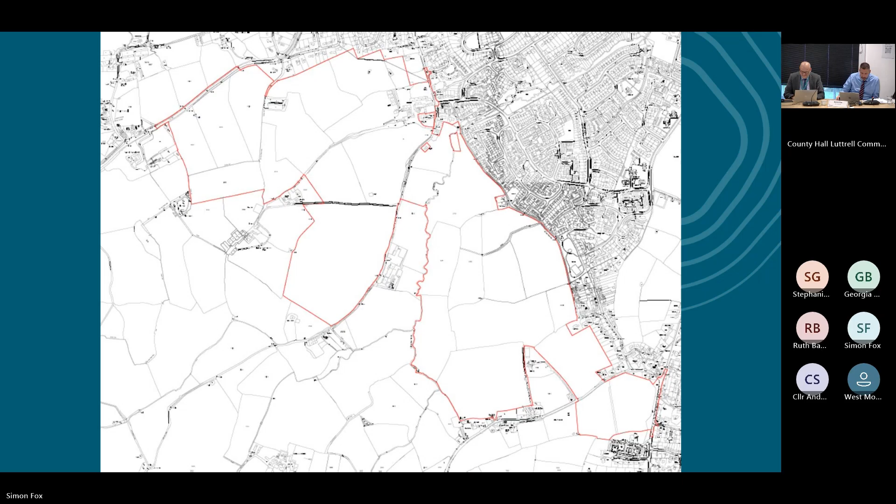Today's focus is on this sort of middle part of the site. You can see from the earthworks on the aerial imagery, that's the part of the site that's currently being worked on to deliver the spine road through. You can see the Orchard Grove Church, which is based at the primary school at weekends.

This is slightly out of date, but it shows the housing having started in the northern part of the site, now coming down across the site towards Trull. So the area that is concerned by this NMA is the area roughly circled in red.

Without the benefit of a site visit, and slightly relying on members recalling from site visits that have been conducted in the past, these next few slides seek to illustrate the nature of the site that we're looking at today.

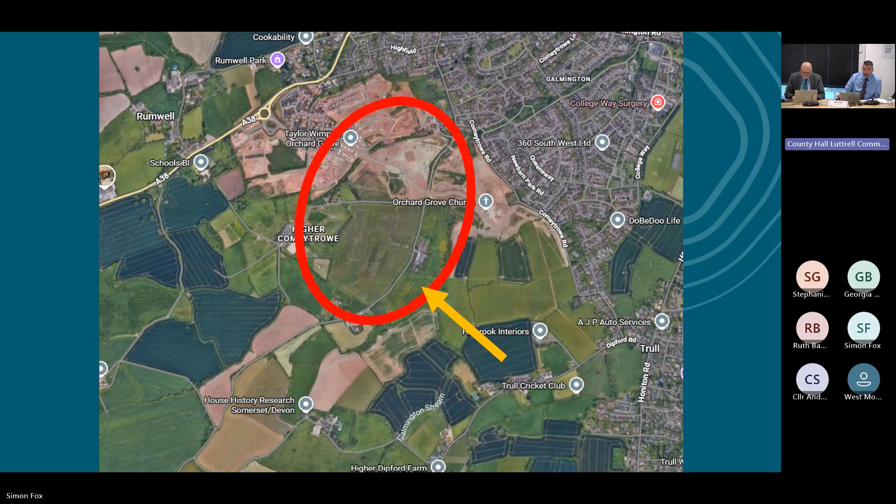So this is the green wedge between the two parts of the allocation. This yellow arrow basically signifies where this bottom view is taken from and where this top view is taken from, to show that the site is not level by any means. It's falling away in different directions, and it forms a high point in the general landscape.

You can see here there's a fall off towards a property called Grassy Rivets, and there's a fall away here to the former abattoir site. The land around the abattoir forms the green wedge that's part of the Comeytrowe garden community site.

The levels are important, and this is an aerial photograph before the site was started. This is the A38, and this is where the roundabout now is at the north end, and the spine road goes through the site towards the Galmington Stream and over to where the primary school is, in this location. Today's application is for effectively this field here.

You can see the abattoir now on the other side of Lipe Hill Lane, and the application extends into this area here. But even on this image, you can see that the land is falling away in various directions, and that's why any application for land remodeling or regrading is of particular interest and needs particular scrutiny.

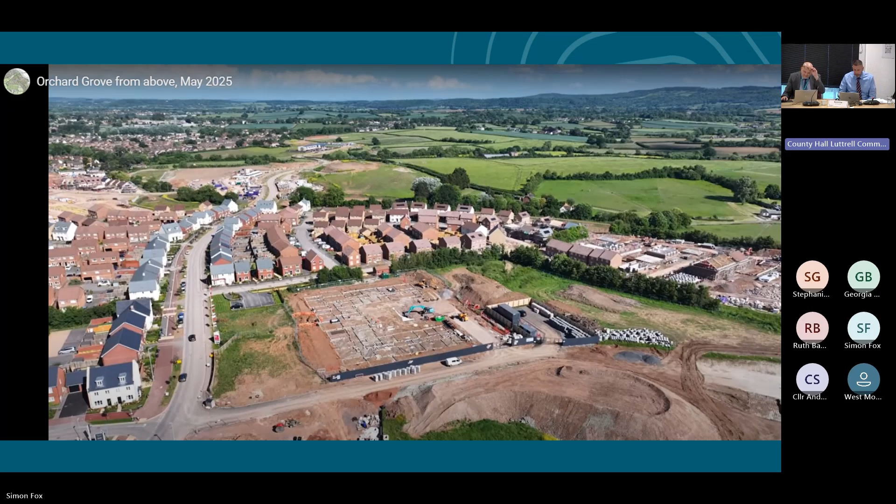So hopefully that's given a sense. The wider area is crisscrossed by public rights of way. On this image, the site that we're looking at is this field here, sandwiched between Higher Comeytrowe Farm and Lipe Hill Lane and the abattoir.

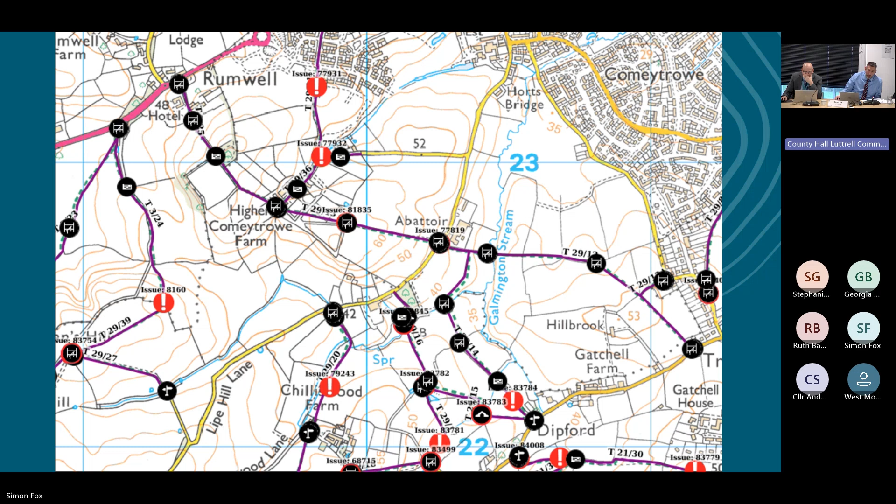You can see here from the topographic information on the OS survey that the high point is in this corner and it falls away in different directions.

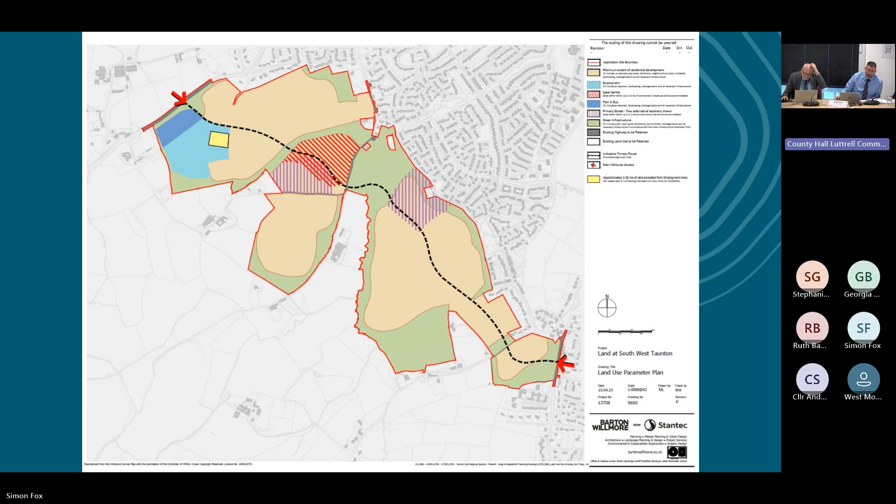This is the land use plan that is approved as part of the revised outline. It shows in a tan colour, the buff colour, the extent of approved residential development and green space surrounding that residential area. You can see that there.

This is the green infrastructure plan. This shows again green space around the outer edges as part mitigation for building on high land, and to provide the requisite quantum of green space for residents to enjoy.

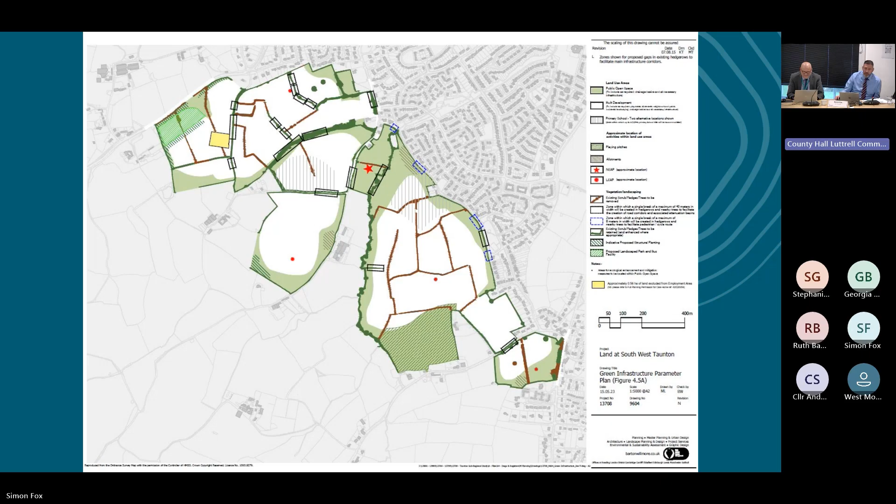This is the approved master plan, which is a refinement of detail from the previous two plans. This shows the intention at the time to lay out a massive residential development surrounded by these outer parks.

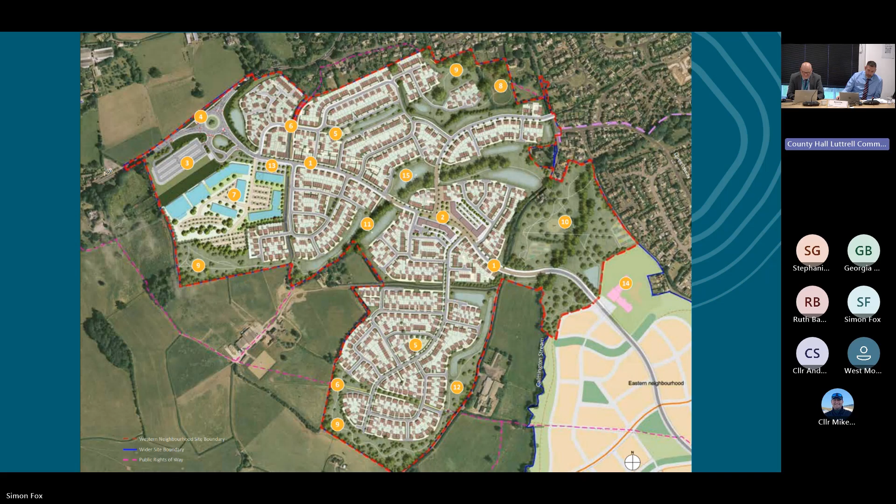You can see the right of way here that runs actually through this field. It extends past the abattoir and then through the site and then through Higher Comeytrowe Farm up to the A38. This was then the next evolution of plans, this plan in 2019, which was a phase 1 infrastructure application.

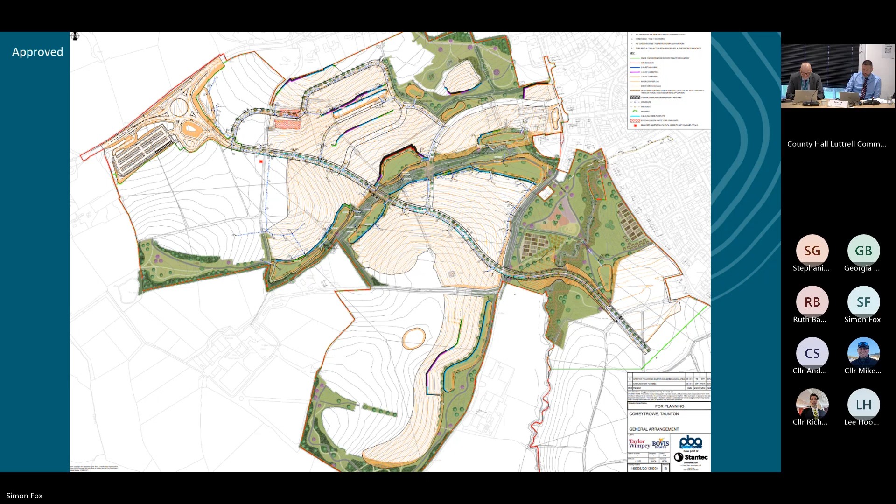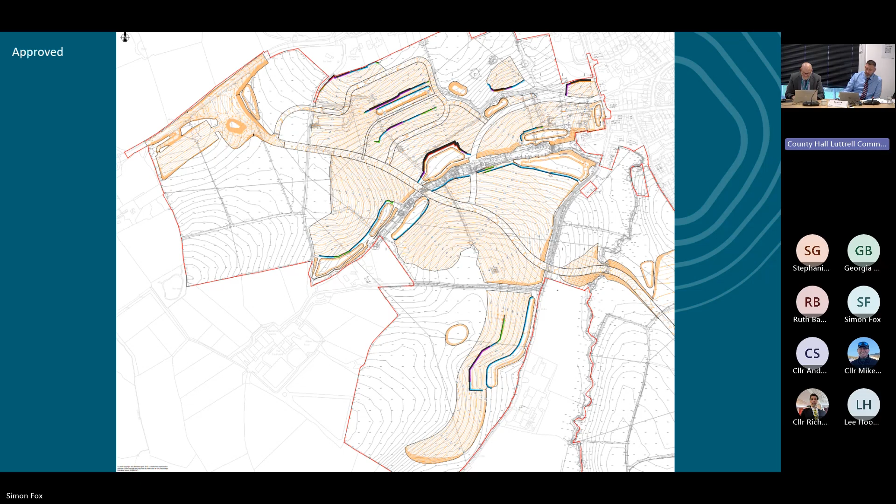This was that same plan, but minus the green spaces, which shows in more contrast the retaining walls that were required across the site to provide those developable platforms.

In the area I'm most concerned about, the southern peninsula, for the reasons that have hopefully become evident through the photographs and images I've shown, is the slopiest field. Because of that slope, it's particularly more prominent in the landscape than perhaps the rest of the site.

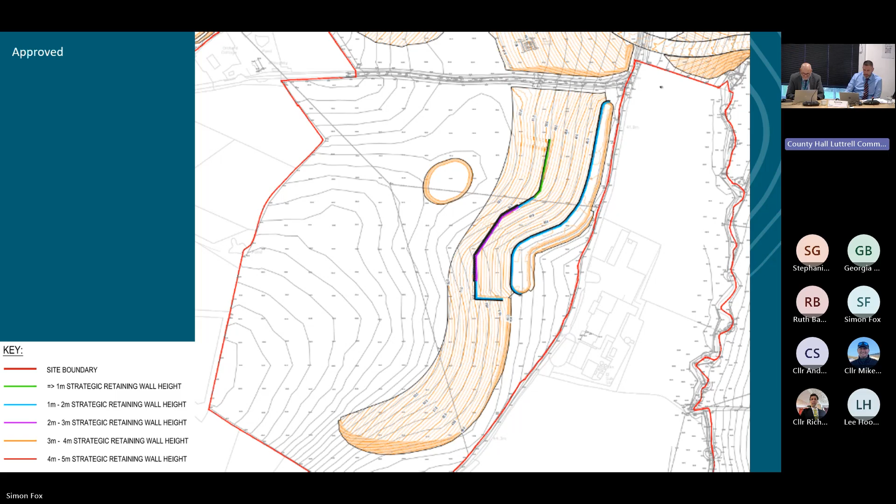The approach in 2019 was to raise part of the site, reprofile it, and install retaining walls to provide those developable platforms. There was also a long, sausage-shaped attenuation basin proposed. This little area here, I think, was a localized raised bit that was being reduced in height.

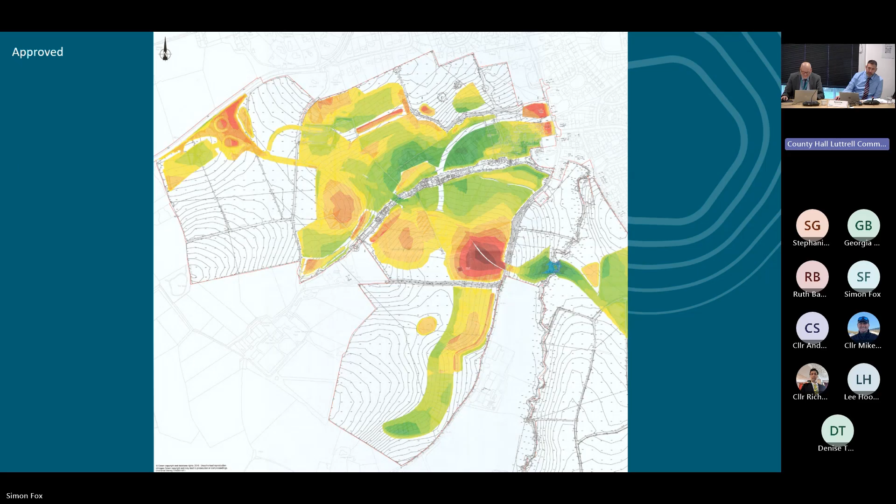This is how it looked in a sort of heat image. The reds were reductions, the darker greens were increases in elevation. So you can see even in this area there were significant areas of land raising to create those platforms.

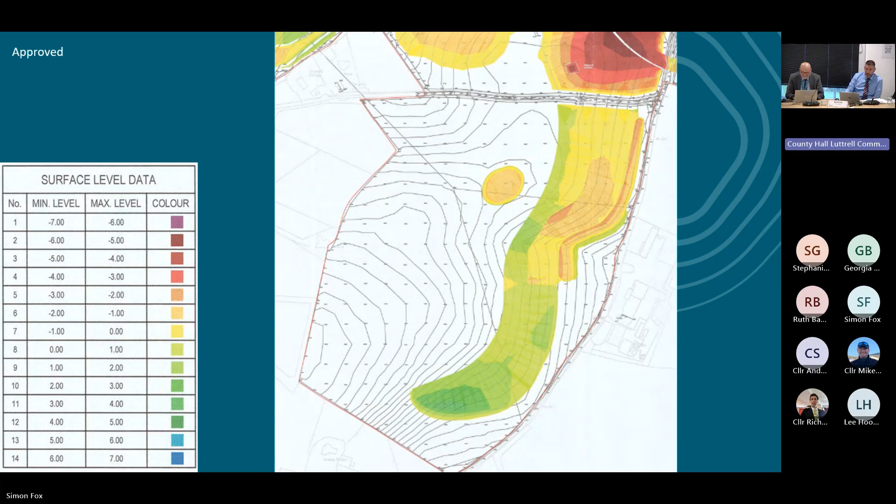That shows it in more detail there. Obviously the oranges, including the basin, were areas being excavated, but not as excavated as this red area here, which was being removed and reduced in height quite considerably.

Alongside all that land releveling and reprofiling, all the open spaces were designed, and we've already looked at some that have been refined since 2019. There was a committee, I want to say April or May, where I presented three items, one of which was the redesign of the Mill Pond area.

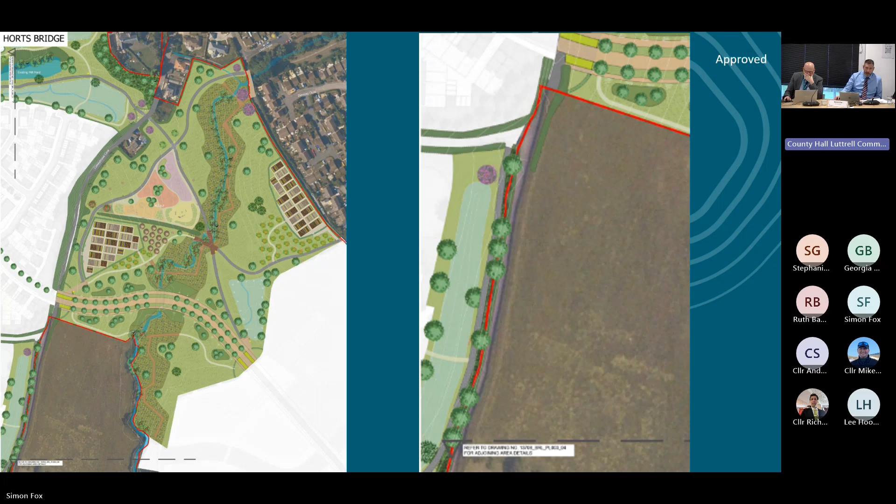Effectively, this is what was approved: this long attenuation basin. You can see this is a detailed plan showing the detailed landscaping for it, coming down round opposite the abattoir with landscaping, and then some larger woodland groups around the southern edge.

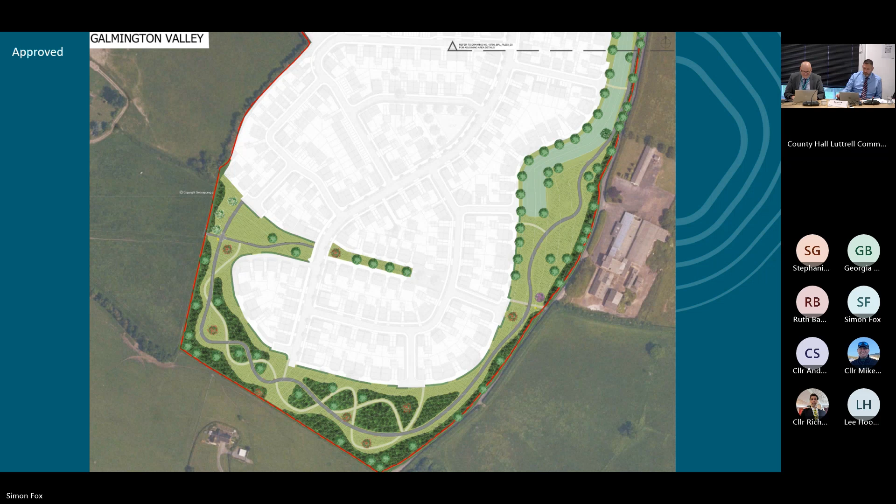This was the Mill Pond area that we approved earlier this year. And this is now what's proposed.

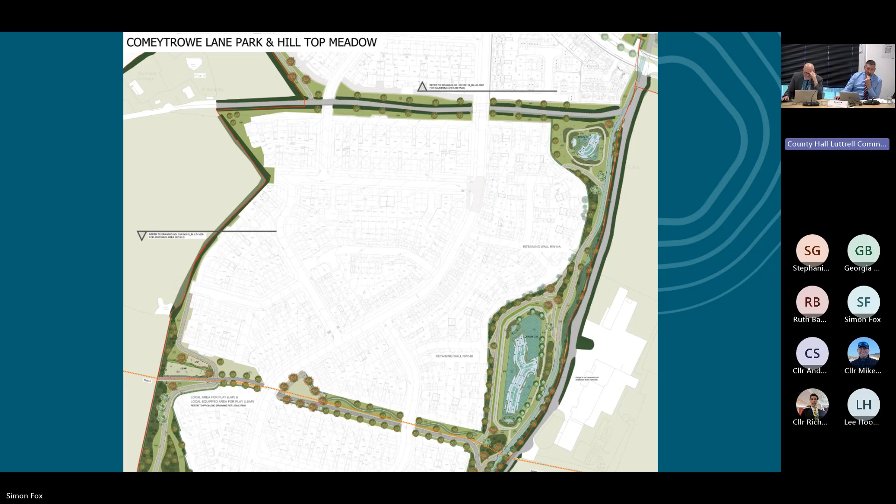Going down around the bottom, we've got a third basin, and this landscaping has been re-augmented. I can't call it a screen because it won't ever screen the houses, which will come later, but it will go some way to diffuse the otherwise angular view of a line of houses that would likely present looking out over the landscape.

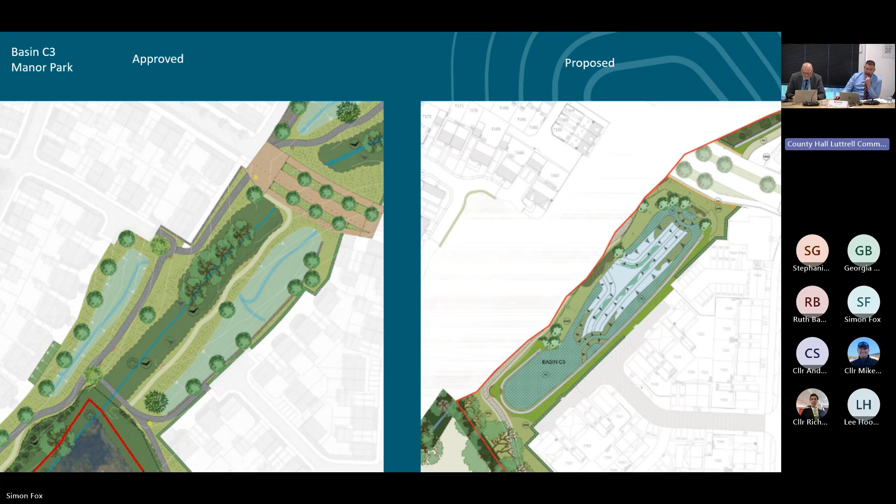So just to reiterate, the approved plan for this basin is on the left and the proposed plan is here. The main difference is that retention of water. Similarly at the Mill Pond, it's a spot-the-difference, but the main difference is the holding of water in the top image, which is the proposed plan.

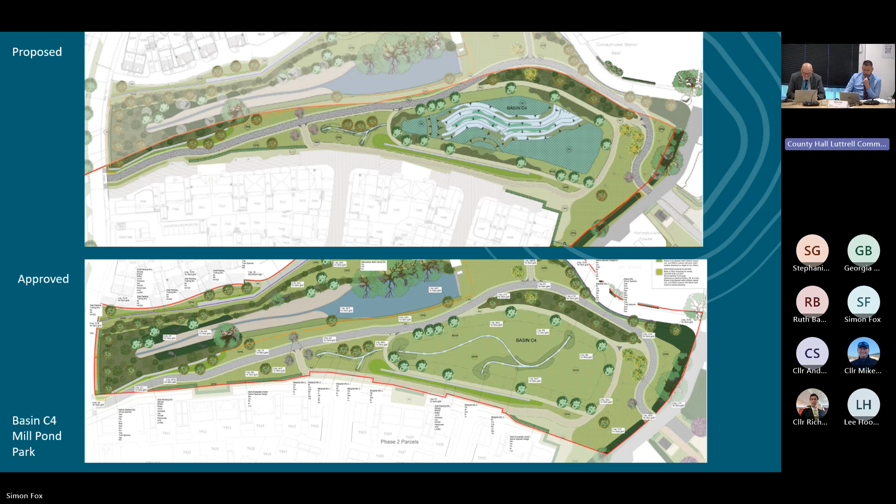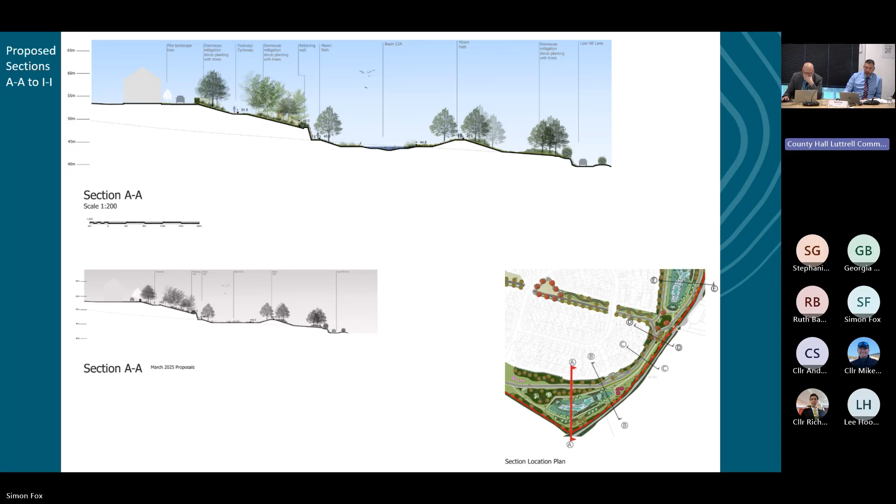So whenever we're looking at land remodeling, we're not actually so concerned about the land modelling in of itself. What we're concerned about is the houses that are going to go on top of it, and that's the one thing we don't have the substantive detail of. So these sections have been prepared based on what's actually being proposed now under this land relevelling, but the houses that are shown are only for indicative purposes. We obviously still have the detailed applications for those houses still to come in the probably not too distant future.

And that's when we get the next opportunity to review and assess the landscape impact of those houses on the wider landscape, because the planting of trees and this land relevelling in of itself doesn't have a substantive landscape impact at all. It's the houses and obviously all the built development that goes on behind this, which will.

But what these sections seek to illustrate is that with any land relevelling, you give a bit of height. What we've tried to do is put the landscaping on the same plateau as the housing, so it's not sat 3 or 4 meters below the level of the house and takes 10 years to even get to the foundation level. We are putting landscaping up at the level where that diffusion of the built form will be maximised.

That's not to say the other tiers aren't landscaped - they are, and it all provides part of the foreground and the mitigation that forms part of this overall landscape approach. But you can see here where there are houses, there are trees close and at more or less the same level, so that landscaping does actually have a full impact.

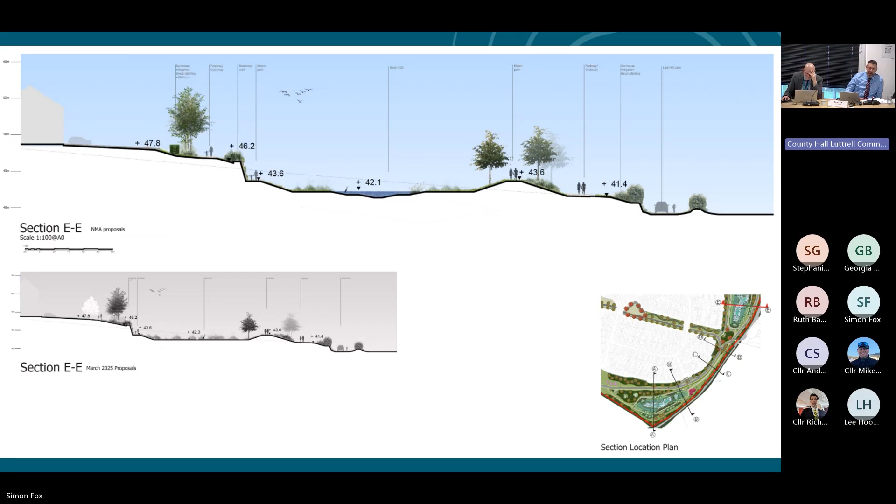And these are the sections now going up the lane, just to show that in some places we're squeezing up against the lane a little bit more. You can see here's the lane - we've got the existing roadside hedge, which will come under management and be allowed to grow up a bit taller, and then we've got 2 or 3 areas of planting with a basin here with more planting.

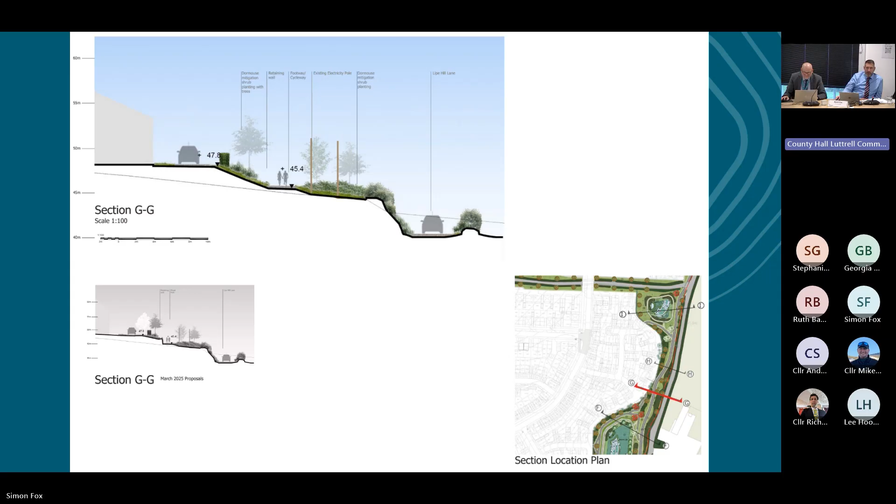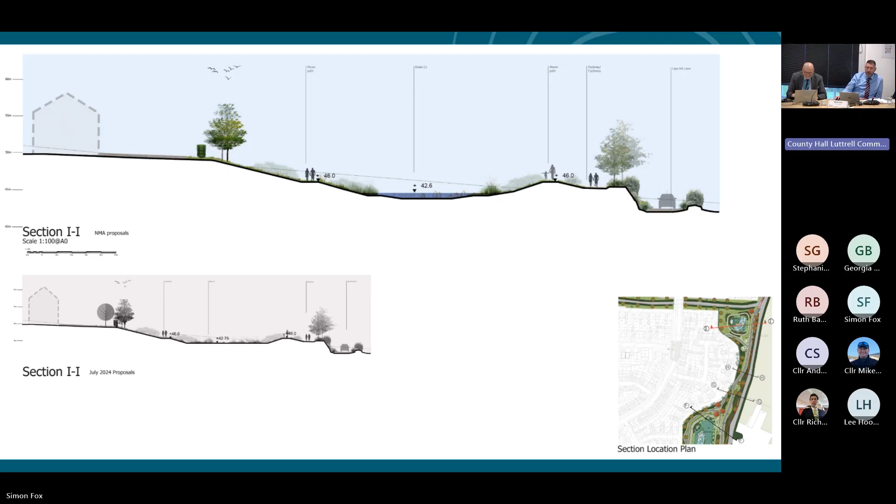Similarly here, this is the narrowest, so we've got substantial beds of planting that allow that landscaping to establish. Again, the top basin there, so that's this cross section here.

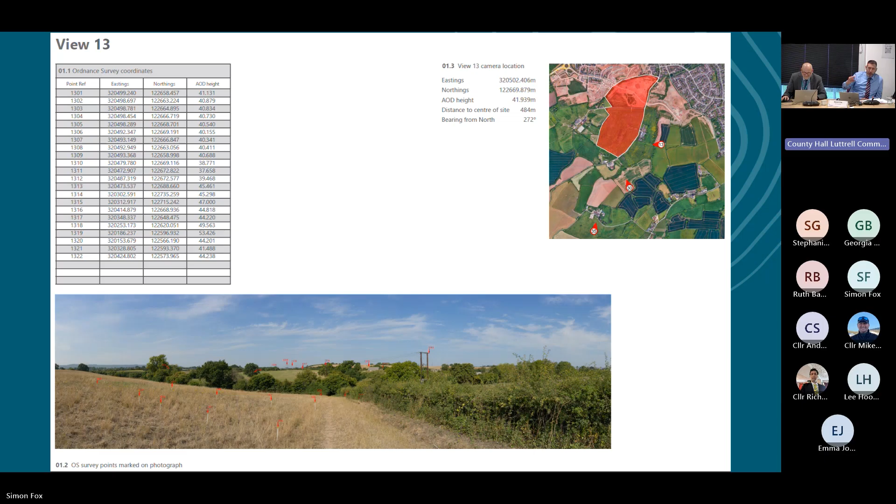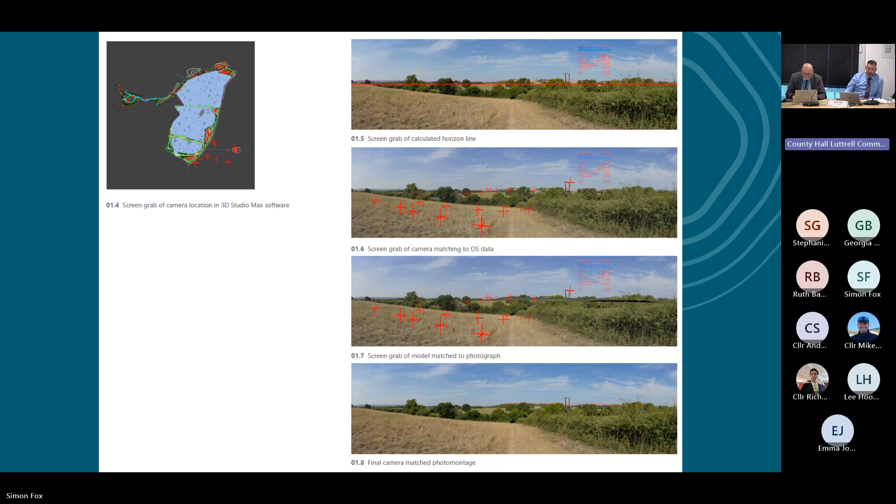Now, there's some minor differences when you knock this one onto the next one, which is after 5 years and then 10 years. So, in fact, I've gone a little bit further, and this document basically shows that there's some science to how they've arrived at basically this drawing here.

So the top image is the existing baseline, a photograph taken as of today, say, and then the bottom image shows how the impact of the landscaping proposed as part of our scheme has matured, or has grown on in 15 years, and what that would look like if a parameter was taken of a consistent roof line.

Now, the next stage, when we get to reserved matters for the housing, is to then augment the actual houses onto this plan so that we can see precisely where the roofs are, where the gaps are, and what landscaping we can put within the parcel of the housing so that it all is mitigated in terms of a consistent line of houses, which is what we don't want.

We want to have diffusion, we want to have gaps to ensure that the landscape impact is as mitigated as possible. This is the next view along, showing the existing baseline, to the south of the parcel. You can see that little ridge there, which is where the site is. Below here is the property I mentioned earlier, Grassy Rivets, and the bottom image shows the effect of that landscaping in 15 years' time.

So there's absolutely no suggestion here that housing is not going to be visible when it's first built. It's going to be very visible. However, the whole landscape approach will be that over time, the landscaping will diffuse that view, and the reserved matters application we later deal with will look at roof tile colours and facing materials, to ensure we're not putting orange roof tiles on a bright rendered property, for example, sort of saying, hey, look at me.

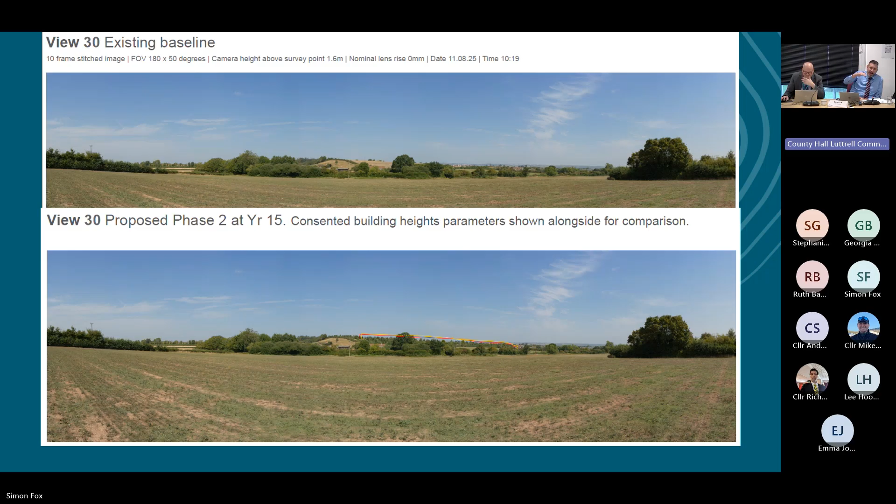That we use materials that mean those houses recess back into effectively that horizon view. In terms of update to the report, there's been extensive consultation with the LLFA, who have no remaining concerns following those discussions, subject to review at the RM stage, where we have more detail about the extent of hard surfacing and therefore the amount of water that needs to be held in the basins. But there's been a very fair assumption of what the built area will be in designing the basins now shown before you. They have asked for an additional condition, so that's proposed.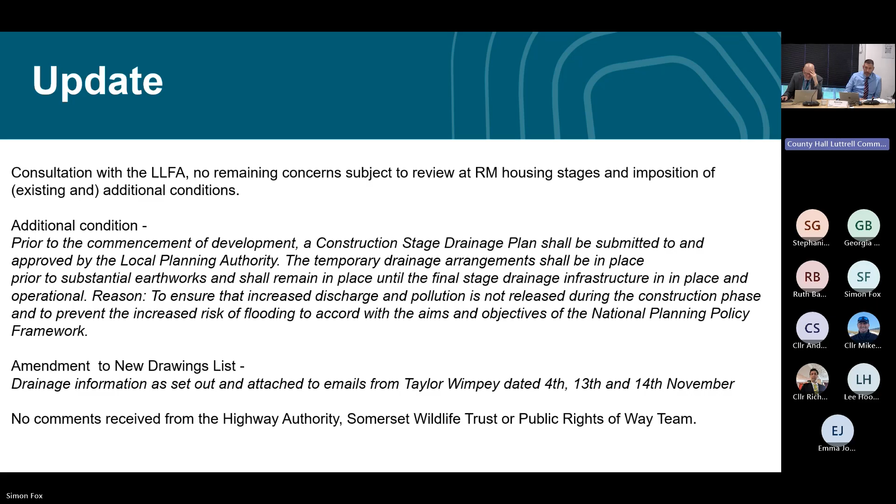There's also an amendment to the new drawings list to include the drainage information that has led to that LLFA position. As we speak, there are no comments received from the Highway Authority. Having said that, I wasn't necessarily expecting any, given the nature of the proposal. The Somerset Wildlife Trust were consulted but haven't responded. The Public Rights of Way team have been consulted but haven't commented yet, and I do believe their comments are important to understand before we make a decision.

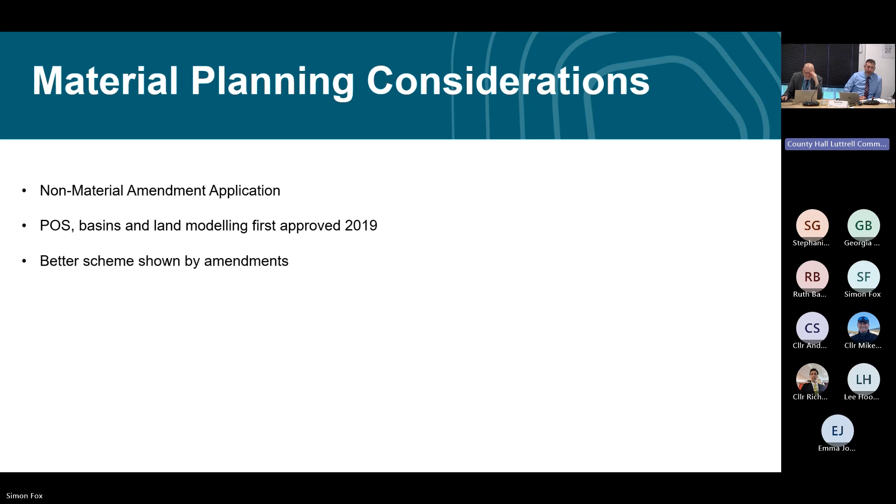The material planning considerations are that it is a non-material amendment application, that the public open space, the attenuation basins and the land modelling scheme was first approved in 2019, and these are revisions to it. In my opinion, this is a better scheme for those elements relevant to this part of the site. But because of the lack of the public right-of-way team having commented yet, I'm reluctant to just press on and seek your full and final approval of this application, subject to the additional LLFA conditions and the updated plans, because the right-of-way runs through the site and will require diversions.

I'd rather the right-of-way team understand what the implications of that are and are able to add any additional conditions or informatives before we issue the decision. However, you can only wait so long, and therefore I said if they do not respond within a week after me chasing them, then we issue the decision, having had the chance to participate in the application. That only seems fair and reasonable.

So yes, the recommendation is that the NMA be granted subject to the stated conditions and subject to no adverse comments from the Rights of Way team. Thank you.

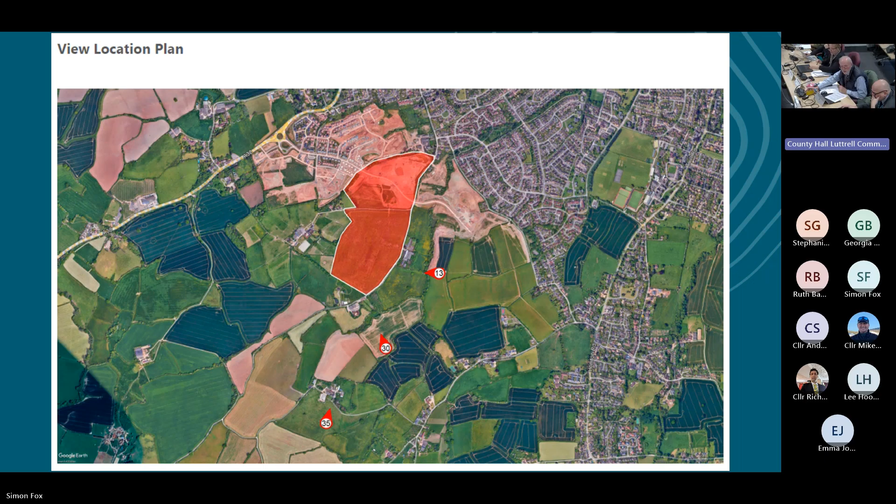Thank you, Mr. Chairman. Interesting one, isn't it? I think non-material amendments are a very useful tool in the planning officer's arsenal, I suppose. But it's interesting that this is being referred to the planning committee, which already sets up in my mind an area of doubt as to the level, because inevitably a non-material amendment has to be judged on fact and degree. And in this particular case, we are looking at landscaping impacts, but we're also looking at drainage impacts.

When I first read the papers, I thought drainage, I really don't see how site drainage can be regarded as non-material. It seemed to be far more important than that. Having now got into it and seen that actually the drainage scheme is pretty much as it was, and there's been a bit of shape shifting, I'm really interested to find out the rationale for holding water in it, because I love holding water. I think it's brilliant. It's really good for wildlife and things like that.

But it's the kind of thing that gives people the screaming abdabs over the danger and risks and all this kind of stuff. So I'd be interested to know why the guidance has changed to allow this rather than draining the site completely. That's the first thing.

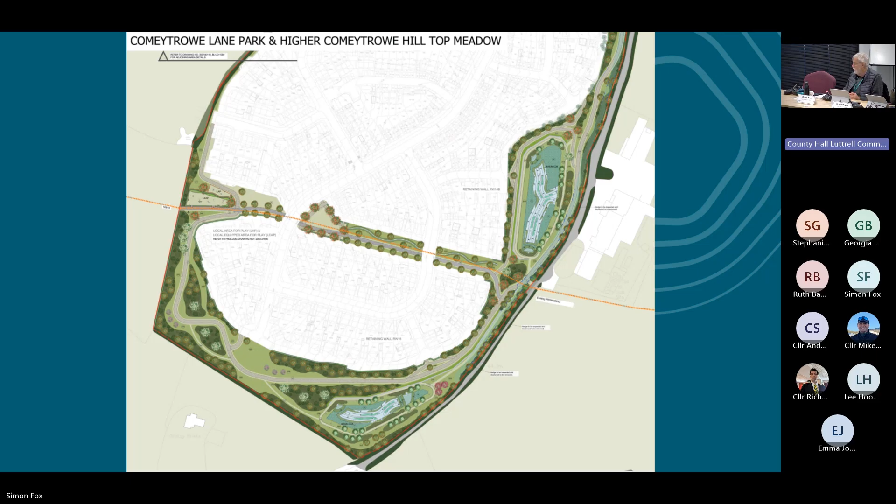Moving on to the details, you talked about a tree belt taking over from the wildlife meadow, and I take the point about the wildlife meadow being thin and narrow, and the soils probably not adapted to wildlife anyway. But I did wonder about the tree belt. If it was close to the edges of the houses, at some point it might cause a conflict, say in 20 years' time, if they got a bit too high, because they're going to be to the east and the south, and there is a risk of shading. So I'd like to know how that's been taken into account.

The other thing is the cut and fill, which is another big element of this, which inevitably means that large parts of the plot, the field, will be made up ground. Now, I don't like made up ground because it's always a bit soft. So if the intention is to build houses on it, the foundations are going to have to be carefully designed and good. That's a problem for the builder, but it's something we need to bear in mind if this is being regarded as non-material. And I think that's where I keep coming back to: is it of insufficient seriousness for us to allow it through without detailed scrutiny? I'm still sort of whirring that round in my mind.

The other thing is trees. Trees are heavily in this. You put trees on made up ground, and if you don't water them properly—and you're talking about putting in fairly big trees—you don't want the things to die on you. I've always had a beef about landscaping conditions, which only last for 5 years. If you stick the trees in made up ground, it drains readily, and in a summer like we just had, all your trees are going to start dying, and this is a major problem. If it's only for 5 years, it's going to start looking very gap-toothed.

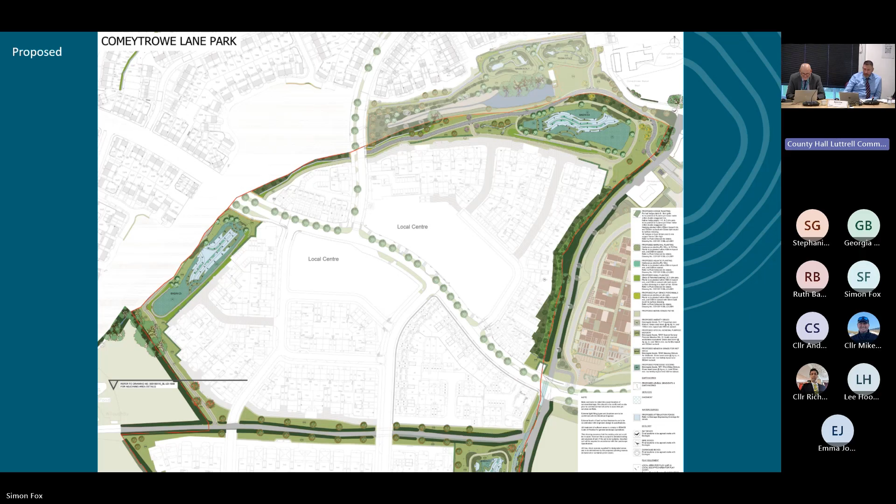Something around the 2 to 3 metre mark, just above the boundary fence. On cut and fill, the long and short of it is we've already approved cut and fill on the majority, all over the site. You can see from the aerial photograph I showed right from the outset that there are areas of cut and areas of fill, because that cut material has literally just been ploughed down the hill and then a retaining wall put in front of it, creating a platform.

The trees are now long life more than anything. We've got conditions on the outline about landscaping, but it's always true, and more true here, that the watering regime is going to be absolutely imperative, because we see lots of tree failures. We're not necessarily immune to it as a council, overseeing tree failures in some of our roadwork schemes. That watering is really important, and that's something I'm going to have to keep on with all the time, because it's something that can easily fall away from people's minds.

The one thing that might sharpen the developers' minds is that they're under an obligation to replant any that fail, so you'd hope that's incentive enough.

The long-term management of the open space is still under discussion with Taunton Town Council, and what that does is set in another safeguard whereby upon transfer that land has got to be transferred in pristine condition, and therefore those trees have got to be viable, and if they're not viable they've got to be replaced at that point anyway. Then it's down to the town council's management thereon as a responsible body to establish those trees. So I think there's reason to be optimistic that, if the town council do decide to adopt green spaces at Orchard Grove, the long-term management is secured.

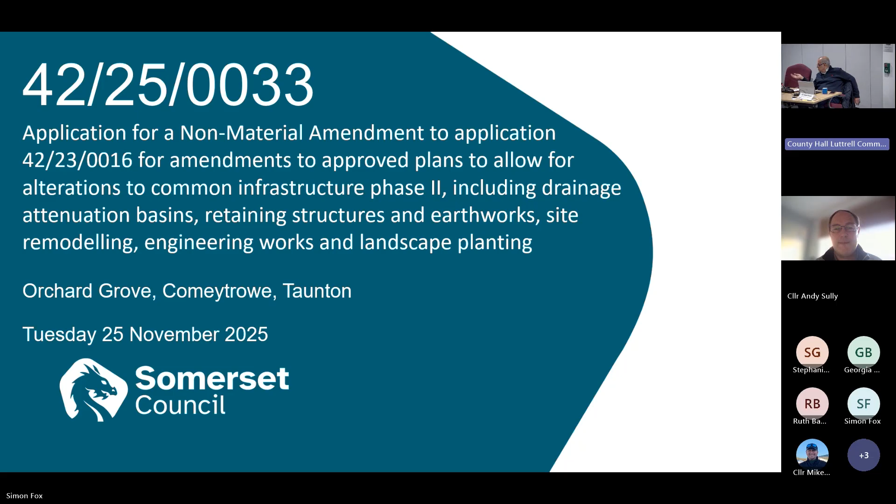That's my understanding, and it has to discharge somewhere. So my little concern is, are they likely to discharge into Lipe Hill Lane, because that's next to the attenuation pond? And what mitigations do we have to actually avoid some of this water flowing into the abattoir, in anticipation that potentially there might be some development at later dates? So how do we avoid that? And how do we actually get the overflow to go from where it is to Galmington Stream? Have we allowed for that, or are we likely to allow for that? What are the implications of that?

The other thing is, from my understanding, these attenuation basins from time to time need cleaning up. Overpopulating them with trees and shrubs and everything else will, at some stage, impede that. So are we actually looking at that as well?

Thank you. So the basins work as a series, like a necklace, effectively. The water will go into each of the ponds and then cascade through the system and will ultimately be discharged into the Galmington Stream. So they're modelled not to overflow into existing residential areas or into Lipe Hill Lane, they will discharge out into the Galmington Stream. So this one here, for example, will discharge into that one, which will discharge into the next one, and then into the Galmington Stream.

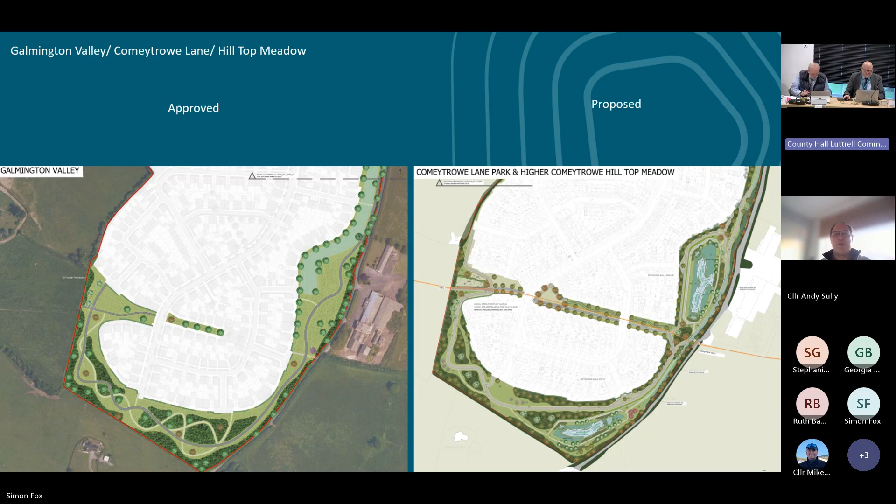14/21/0047, land east of the A38, south of Walford Cross, Monkton Heathfield. This is to receive an update report on the application for outline planning permission with all matters reserved except for access, comprising up to 1,450 dwellings, 4.91 hectares of land for employment uses, and 8 hectares for a school, a mixed use.

So I'm going to move to Mr. Fox. Yes, thanks, Chair. I suppose first an apology that this update hasn't come sooner. The last update, which followed I think 3 updates previous to that, was this time last year. But with it being a month to Christmas, I thought I'd bring you an early present. Not a good present, there, really, is it?

Basically, this year, since the last update, where I had maybe optimistically forecast that we would be back before you in the spring with a report, it soon became clear that wasn't going to be possible because there was need to nail down the highways package for this scheme, which is obviously extensive. There were also ongoing discussions about financial viability. So of all the issues that have been pertinent to this application, we had 2 that really have persisted.

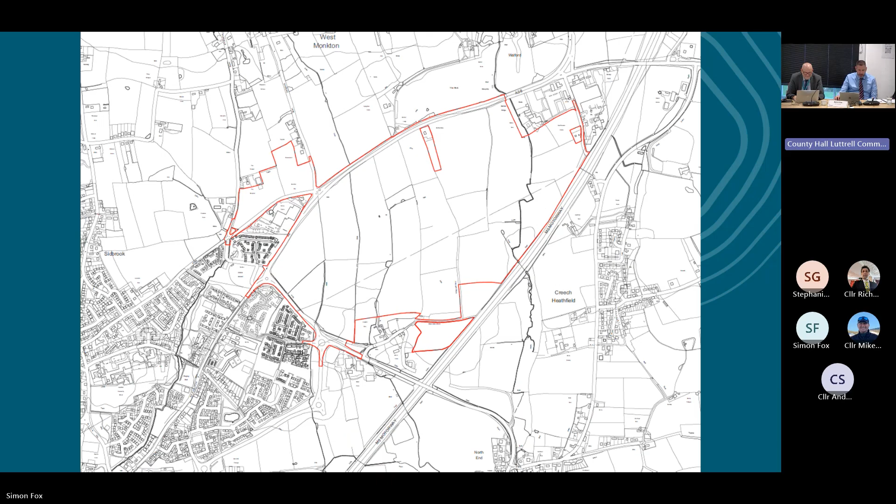So that's where we are really. I have got, just as a refresh, obviously that's the red line of the site for 1,450 homes. This was the master plan that was presented in September 22, which had the reasons for refusal, and this included the outer relief road.

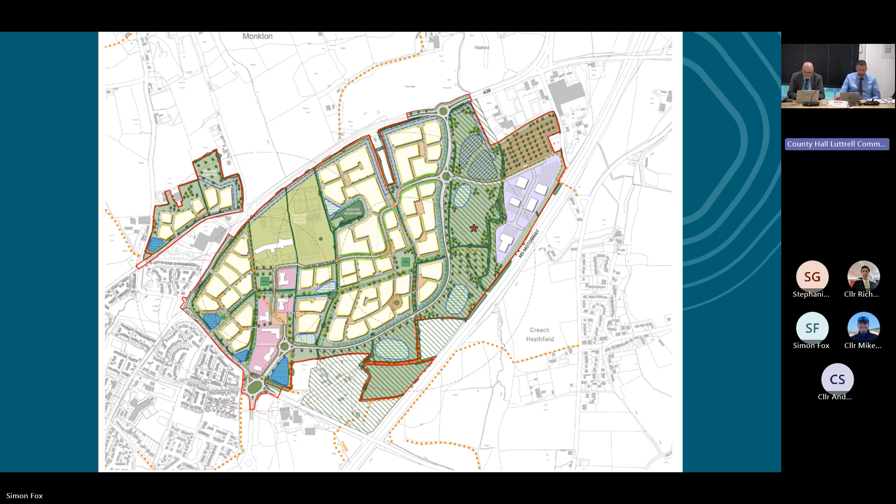The site's been rebranded as Langaller Park, and this is the master plan, which hasn't changed at all, I don't think, or changed very, very minutely since September last year, because it's not this that we've been negotiating and debating. It's can we afford everything that the council is asking for in terms of planning obligations.

And there has been a greater need, I would say, for dialogue with the parish councils, for example, because taking the last site as an example, around public open space management, we don't want this to go to a private manco, and the administrative area for this site is West Monkton Parish and Creech St Michael Parish. So they have very different views on life in terms of managing facilities and just things. And our CIL regime doesn't particularly help in that conversation.

There's a large amount of CIL that's payable, so there's a conversation as to whether this site is exempted. There's the level of affordable housing that the site can deliver, which obviously all members want to see as much as possible. But we've got some very, very substantial weighty infrastructure elements here.

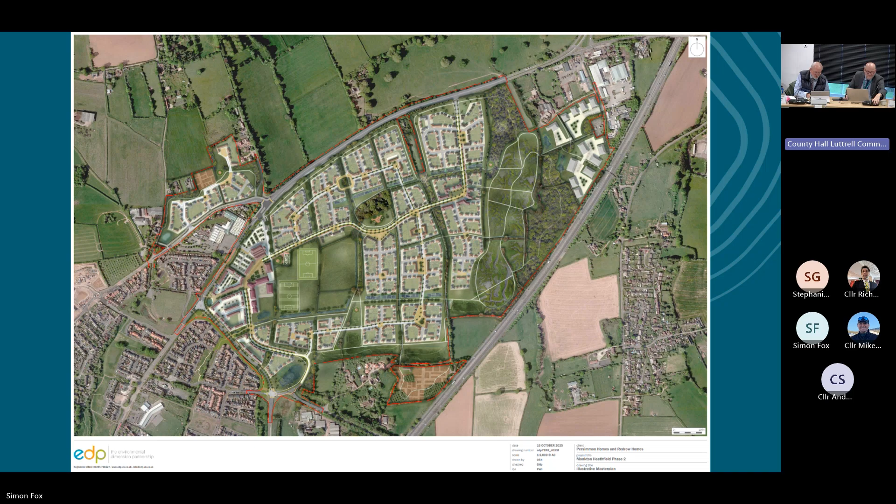Just as an aside, Simon, would it be helpful if the parishes of Creech and Monkton merged? Would that make your life easier? Well, quite. Yeah, the people of Monkton and Creech. I wasn't prepared to make a statement on this, but I think the governance review will bring about a number of questions, of which, of course, I'd have an opinion on. I wasn't aware that was in our gifts or your gifts as members, but yeah.

Appeals. So there's quite a few in there, and obviously you'll have seen some of the appeal decisions. I'm not going to go through them word by word, but the first one's an interesting one. It's an appeal that's been lodged recently. We don't have a determination yet, but that's at Cheddon Road and it's for 112 dwellings. This is an appeal on non-determination grounds.

Officers had delayed bringing this to committee pending the outcome of the Green Wedge review. I think we've mentioned that at previous meetings. That's now being undertaken by a company called DAC on the council's behalf. But rather than waiting for the outcome of that, we did try and negotiate with the developer to hold their appeal in abeyance. But they've made a commercial decision that they wanted to go to appeal. And so the final decision now rests with the Planning Inspectorate.

Having said that, we are intending to bring a report to you as the West Planning Committee on the 16th of December. And we'll be asking members to resolve what you would have decided had you still been in a position to make a formal determination. So you won't actually be making a determination, but it will certainly help us in terms of how we approach the appeal process, any areas of key concern, and it will help us in the preparation of a statement of common ground with the appellant.